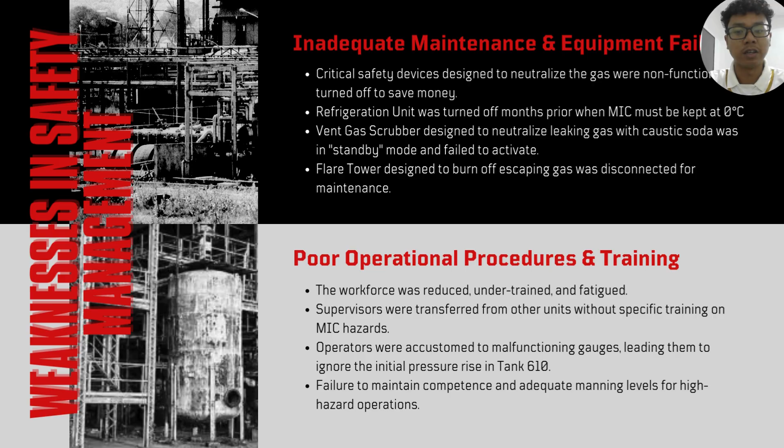This tragedy could have been easily avoided if the weaknesses in safety management weren't ignored. The first sign was inadequate maintenance and equipment failure. Critical safety devices designed to neutralize the gas were non-functional or turned off to save money. Then, poor operational procedures and training. The workforce in UCIL was severely reduced, undertrained, and fatigued.

The next sign was the flawed plant siting and emergency planning. Lack of communication with the public and poor planning led to multiple locals losing their lives. And finally, corporate governance and double standards. The Bhopal plant relied on manual safety systems, whereas the sister plant in West Virginia, USA, had computerized automated warnings.

The ones responsible for allowing such actions to take place and the ones who are to be held accountable are none other than the CEO of the Union Carbide Corporation himself, Warren Anderson, head of the parent corporation at the time. He was charged with culpable homicide but successfully evaded extradition from the US to stand trial in India.

Next are the companies themselves. Union Carbide Corporation and Union Carbide India Limited were responsible for the negligence and dangerous cost-cutting measures which ultimately led to causing the tragedy to happen in the first place.

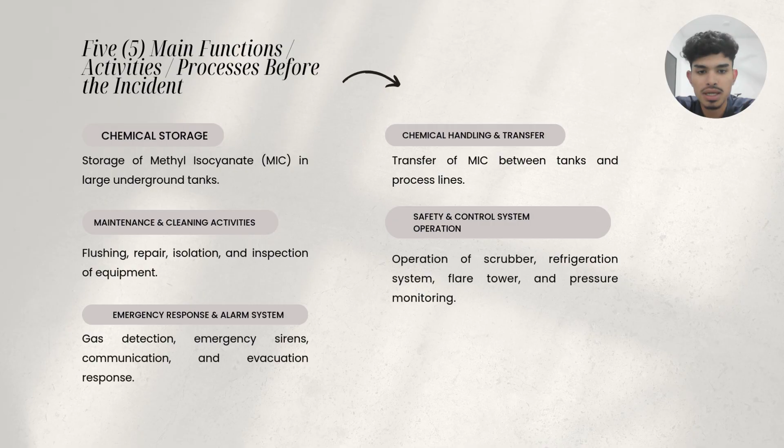Number three, emergency response and alarm system: gas detection, emergency siren, communication, and evacuation response. Number four, chemical handling and transfer: transfer of MIC between tank and process line. Finally, safety and control system: operating of scrubbing, refrigerating system, flare tower, and pressure monitoring.

For the FMEA table, failure mode effect analysis, I will tell the highest RPN only. Okay, so first process step, MIC storage. Potential failure mode, water ingress into MIC tank. For the potential failure effect, violent exothermic reaction, SEV 10. Potential cause, faulty valve, OCC 6. Current control, poor isolation procedure, DET 9, and the RPN is 540.

Corrective action for this MIC storage: install check non-return valve, and double block and bleed and automatic isolation interlock. Number three, handling transfer.

Pipe leak, corrosion during transfer, slow leak, SEV 9. Potential cause, wrong material selection, OCC 7. Current control, visual inspection, DET 9, DET 6, and RPN we got 378. For the corrective action, schedule NDT and corrosion monitoring.

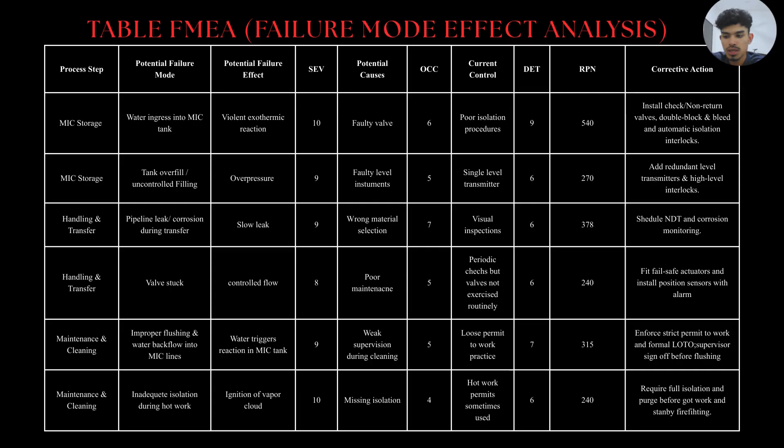And RPN 315. Corrective action: enforce strict permit to work and formal LOTO, supervisor sign off before flushing.

After we see the table FMEA, we got the top 3 critical failures and corrective actions for the Bhopal disaster. Number 1, MIC storage, water ingress into the MIC tank. So they need to install a check non-return valve, double block and bleed, moisture or water sensor, automatic isolation interlock, enforced permit to work, and also secondary containment and neutralization pit.

Number 2, handling and transfer. Pipe leak, so they need to schedule NDT and corrosion monitoring so they can replace critical sections with corrosion-resistant material. Lastly, number 3, maintenance and cleaning. Improper flushing and water backflow into the MIC line.

They need to enforce strict permit to work and formal LOTO. So the supervisor needs to sign off before flushing the MIC line using an inert purge method instead of water. They need to have training, competency and checks.

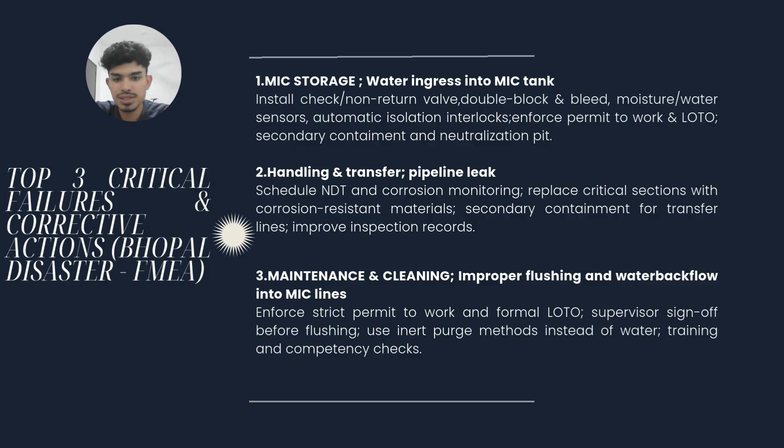Assalamualaikum and good day. My name is Faiq Nabil Ashraf and I will be presenting the MSDS analysis section, which stands for Material Safety Data Sheets.

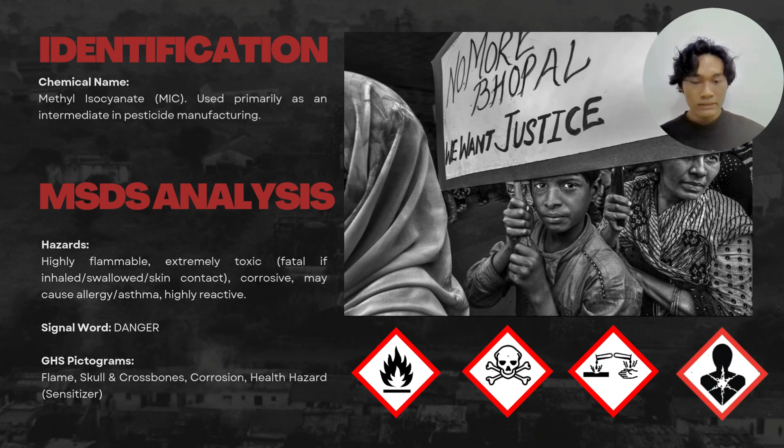Without further delay, the chemical involved in the Bhopal incident is methyl isocyanate, in short form MIC, which is used primarily as an intermediate in pesticide manufacturing. The chemical has several hazards: highly flammable, extremely toxic, corrosive, and highly reactive. As shown by the GHS pictograms, it includes signage for flame, skull and crossbones, corrosion, and lastly, health hazard.

For the exposure limit, MIC has a very low allowable concentration in the air, which is 0.02 ppm. This means even a very small amount can be dangerous to health. For the PPE required when handling MIC, workers must wear respiratory protection, chemical-resistant gloves, and safety goggles, and contaminated clothes must be removed immediately.

Next, for the health hazard, this chemical can cause skin irritation, breathing difficulty, allergic reaction, dizziness, and may also cause damage to organs through long-term exposure. It is also suspected of harming fertility and the unborn child.

For spill and fire control, it is important to keep away from ignition sources because the chemical is highly flammable. Spills must be absorbed with sand or similar material and kept away from drains or waterways. Fire should be controlled using CO2, dry powder, or water spray.

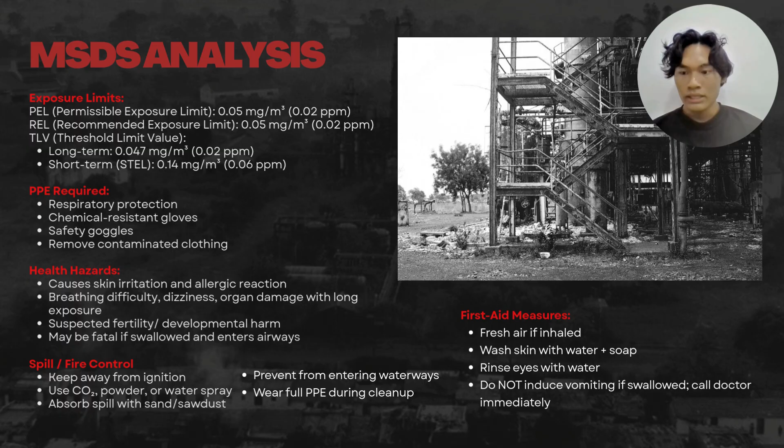In addition, the first aid measures for MIC include moving the person to fresh air if inhaled, washing the skin with water and soap, rinsing eyes with clean water, and not inducing vomiting if swallowed. Medical attention must be given immediately.

Lastly, I would like to talk about the hazard comparison and the highest risk chemical. Based on MSDS analysis, MIC is identified as the highest risk chemical because it is extremely toxic even at a very low exposure limit, which is 0.02 ppm, highly flammable, and can easily form harmful vapor.

It also causes serious breathing problems, skin irritation, and long-term organ damage, and is suspected to harm fertility and the unborn child. Overall, the combination of high toxicity, fast vapor release, and multiple health dangers means methyl isocyanate poses the biggest risk to human health.

Hi, I'm Hakim and I'll be presenting the safety improvement and prevention plan for our case study. Based on our FMEA and MSDS findings, we propose 5 improvement plans. The first one is improving MIC storage safety by limiting tank fill to no more than 50% capacity, and a daily inspection checklist and weekly leak tests.

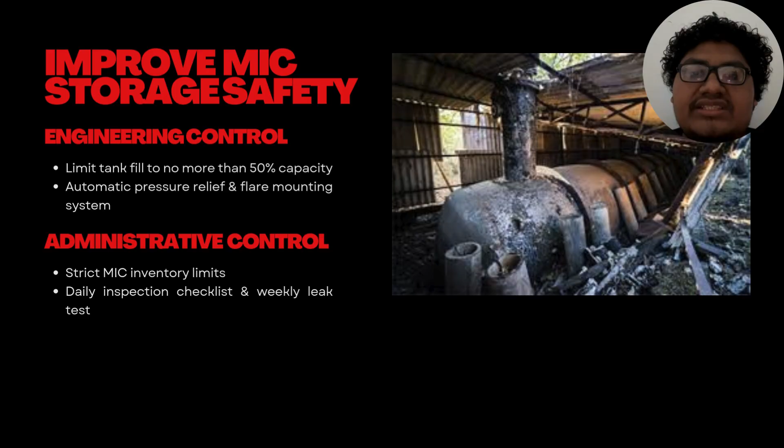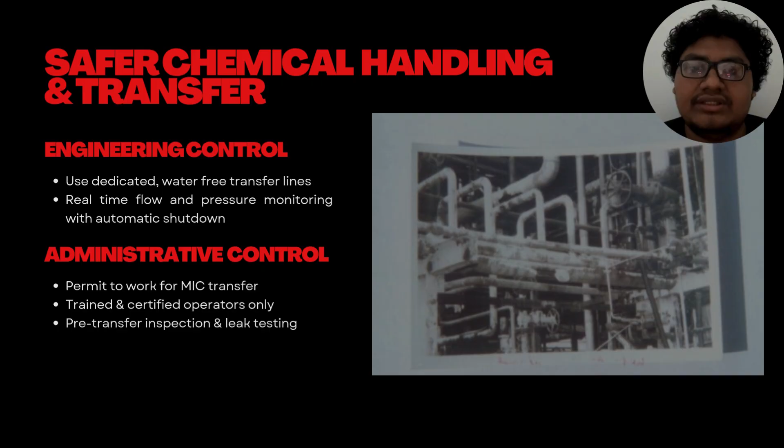The second plan is safer chemical handling and transfer. For example, monitoring real-time flow and pressure with automatic shutdowns, and a permit to work for MIC transfer work. The third plan is maintenance and cleaning controls. For example, installing gas detectors around maintenance zones and having a competency test for workers before doing maintenance work.

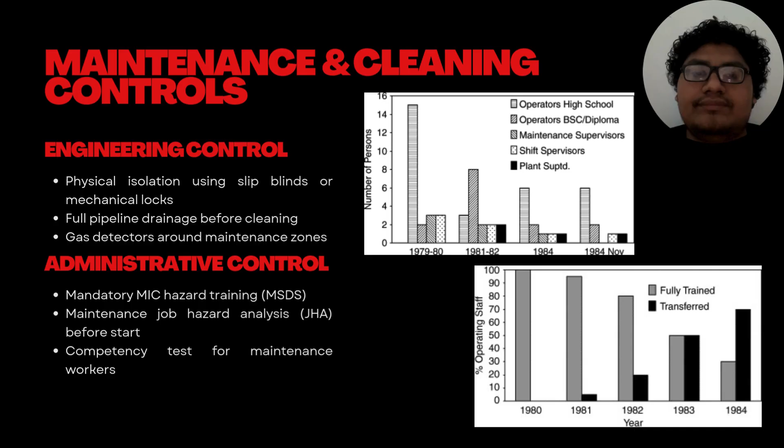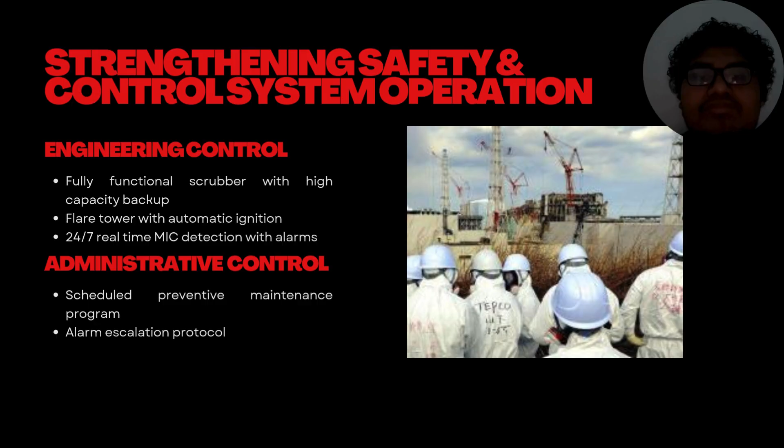The fourth plan is strengthening the safety and control system operations. For example, having the MIC alarm detection turned on all the time. And the second is planning a scheduled preventive maintenance program in case any accidents occur.

The last one is emergency response and alarm preparedness, such as making sure the citywide siren system is fully functional, creating a community emergency response plan, and having public drill exercises every 6 months.